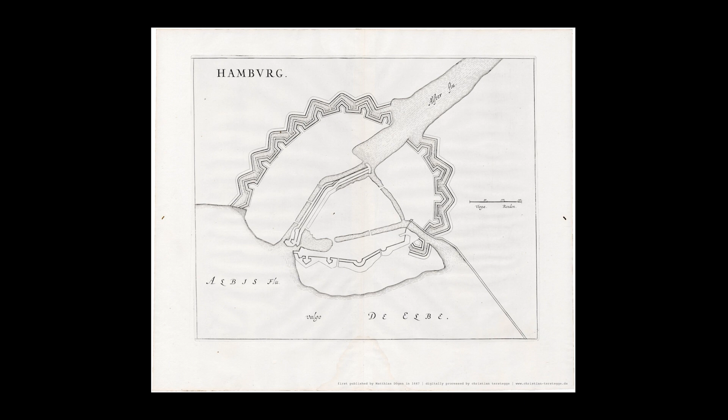This is not a very coherent or complete way of looking into the history, but this is a 17th century, 1650 map where we see the city was surrounded by this water and canal system. It was also connected by these waterways, and the Nikolai Church is probably the very center, and then the canal is today called Nikolai Fleet.

And the bridge is already there in the 17th century or even before. This is the so-called Holzbrücke, because at some point it was a wooden timber construction, but this significant bridge over the canal changed its nature, its appearance, its construction over the course of time. When we started the project, we really tried to grasp the essence of such a place.

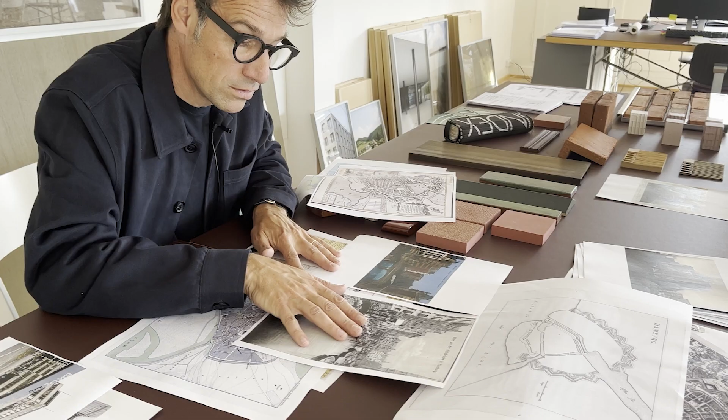That's Hamburg before the war. We see the canals, we see the presence of all these different boats and ships delivering goods. In that sense, as in many other places, I would even compare it not only to Amsterdam, but even maybe Venice. Of course, the facade to the river or to the water, to the canal, is a very important facade for a building.

And this is something that maybe comes back when we look at the design in a minute, because the way we understand urban architecture, we always try to relate and connect to these different layers of history and context. So it's not only history, it's culture at large, but we try to establish moments of dialogue or connections to what's there, or what is the history of the place.

How does a building, how does a house sit on a road that makes the crossing of the river? What is called in German the Brückenkopf, the bridge head, the building that forms the entry point to the passageway of the bridge. This is a very specific, and I would say an outstanding condition for an urban building, and this is what we're dealing with here.

Looking at Holzbrücke, having changed over time, we see the motif of this Brückenkopf. Looking also into different directions, Holzbrücke und Hopfenmarkt, you see here the Holzbrücke. In the back, we're looking at the market that at the time was also occupied by tent and market hall structures. And this here is our site.

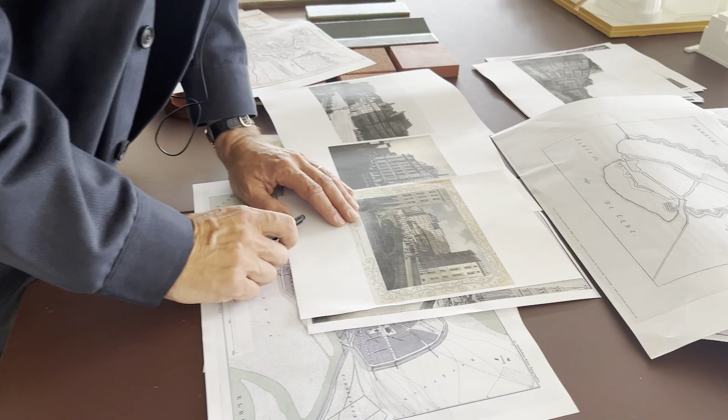This is Hopfenmarkt, and what we see dominating the square is the tower, the bell tower of Nikolai Kirche. The Nikolai Church was destroyed in the war. Only the tower got rebuilt, whereas the rest of the church, the nave and the whole space, continues to exist as a ruin. So it is a memorial, in that sense, a very meaningful and very prominent place in the city.

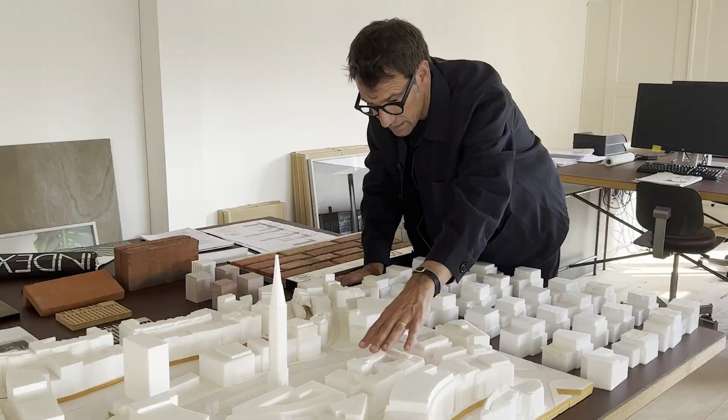So here on Hopfenmarkt, we see different types of buildings around it, and our project belongs to this row. What is particularly interesting is that this series, this row of buildings, forms a facade to the square, but at the same time, it also makes a facade to the Fleet. It's a sort of a canal that then joins the Hamburg harbor.

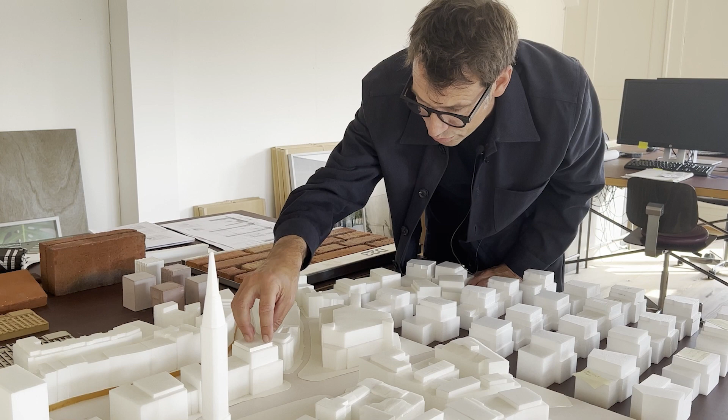Not only is our project part of that row of houses, it also forms a sort of a head. It is like the cornerstone within that system. So it is not only forming a corner on the square, but also it gives a face to the canal, and it is at the bridge.

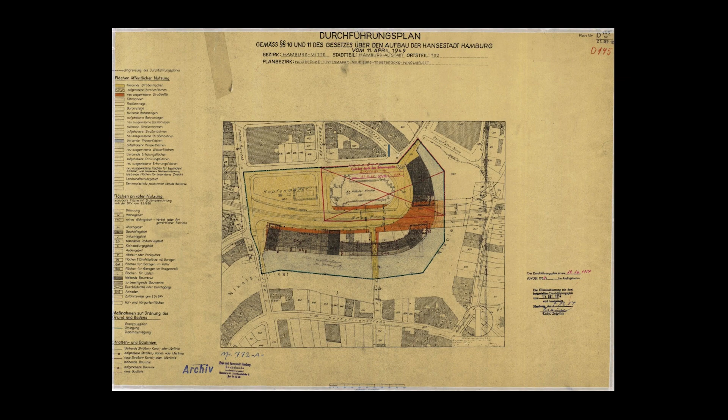To see what this actually really means if we go into depth in such a place like in the city center of Hamburg, what discontinuity, reinvention, rupture in a way, then also the attempts of trying to rebuild the pre-existing historic fabric, all these different and often contradictory attempts of building and rebuilding the city is an exemplary case here in front of us.

The further investigation was all about the proportion of these columns or pillars. It is not a classicist architecture. It is rather an attempt of giving almost an expressionist attitude or form to a modern building. So we see, basically, it is pillars and slabs.

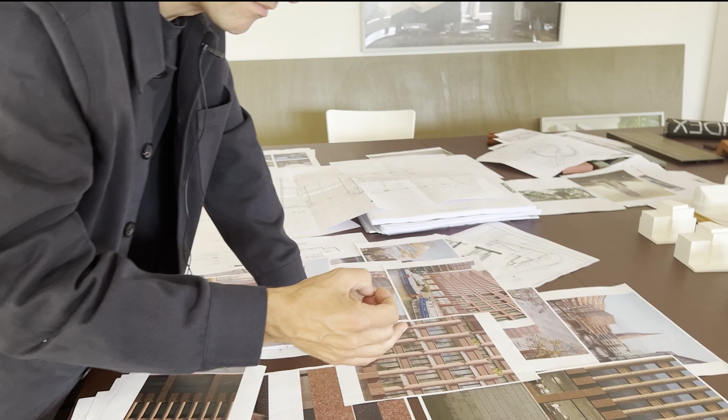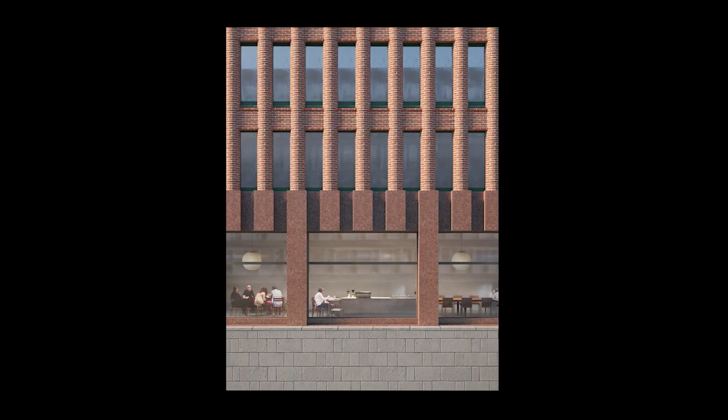So it's a very reduced concrete construction on the inside, reduced to a minimum. The facade is built out of brick, on a socle, on a base, which will be executed in concrete.

This is polished concrete, and then we see the bricks, and we see the rhythm of brick columns. They are rounded, so it gives even more of this plastic aspect to it. From then on, it's all about the proportions of the column, the vertical towards the horizontal, the width of the windows. In the case of the housing, there is a loggia, so the actual windows are set back from the pillars.

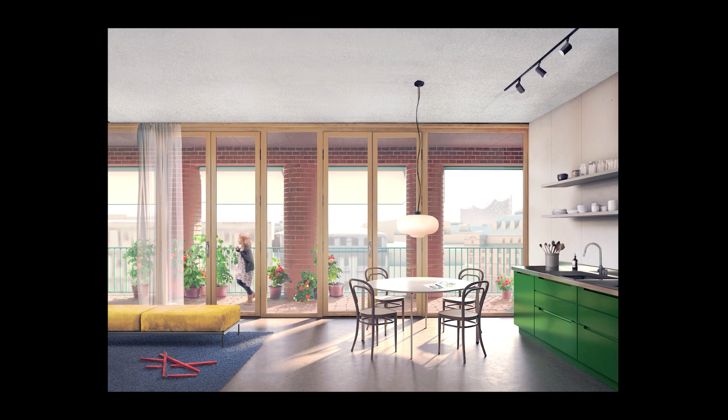Of course, this facade is also offering a specific quality from the inside, looking at it from the apartment. Here you see this is quite a simple space, the balcony loggia on the waterfront, the pillars that somehow set literally the frame to the architectural experience and the spatial condition.

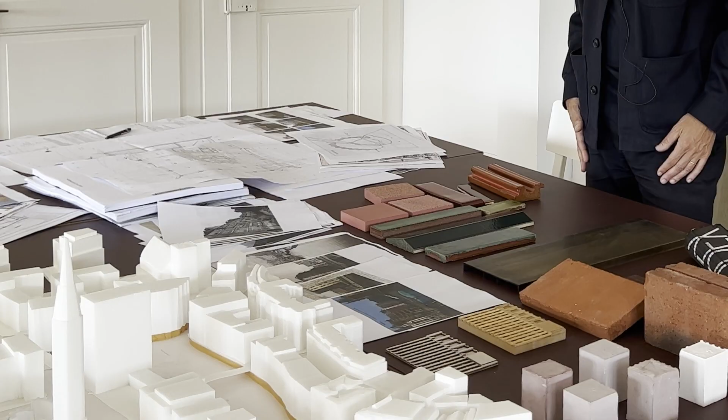We are conceiving a modern, contemporary building that is looking towards the future, but somehow it is rooted in all that. In that sense, we felt very tempted to use brick, which is not an original choice at all in general, and particularly not in Hamburg, in the context of Hamburg, which still has a very lively and, I think, also very productive brick culture.

So there is not only tradition, but it is also a very much contemporary reality. We were talking, and are still talking, to different brick manufacturers, and actually there is one not far from Hamburg. I think this is now one of the products that, together with the client and everybody involved, we are evaluating.

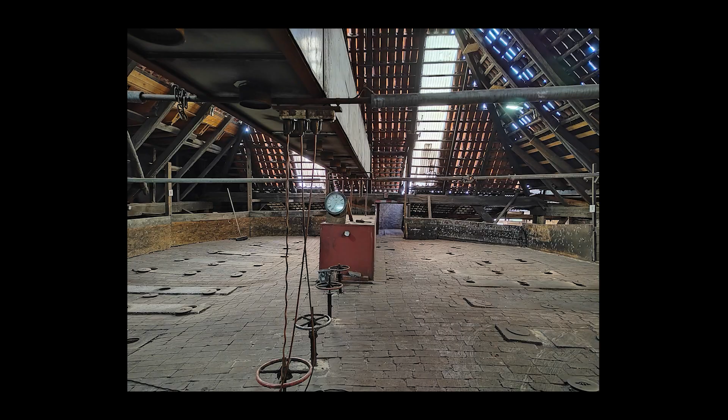It's a sort of ring oven, where the brick is not pushed or pulled on a conveyor belt to a conventional oven where the clay is burned and fired, but rather it is a circular building dating from the 19th century, where the fire is somehow migrating or wandering along the circle. By doing that, over 17 days, I believe, all the clay portions that are laid out are then burned.

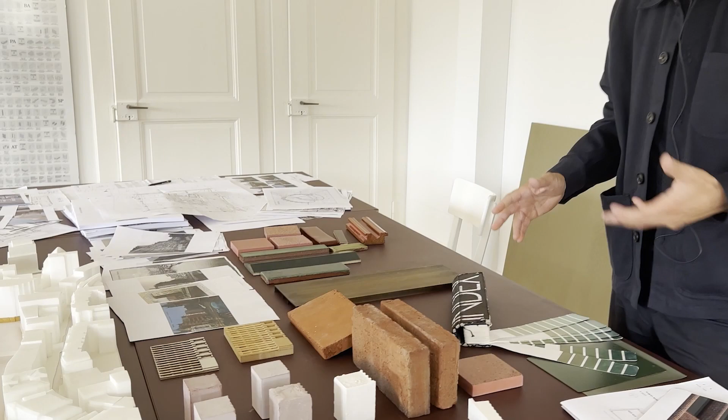So the idea is that our building is built of that local material that somehow belongs to the place. In that sense, this is quite a heavy and, I think, a beautiful decision. But then it is of course also to be contrasted with other materials.

The main windows will be timber frame windows, painted with a green paint, the green color. We are still testing different green tones. This is something that, as I guess most architects, we spend a lot of time finding the right tone, obviously, and then we do bigger samples.

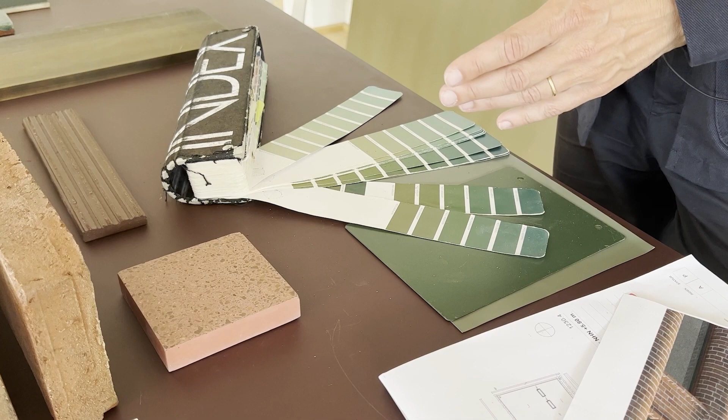We carry these samples with us in order to then build an even bigger mock-up, something that will follow. Parallel to that, we also use the computer and do these renderings, which try to give an almost naturalistic view of some details, how the window sits on the brickwork.

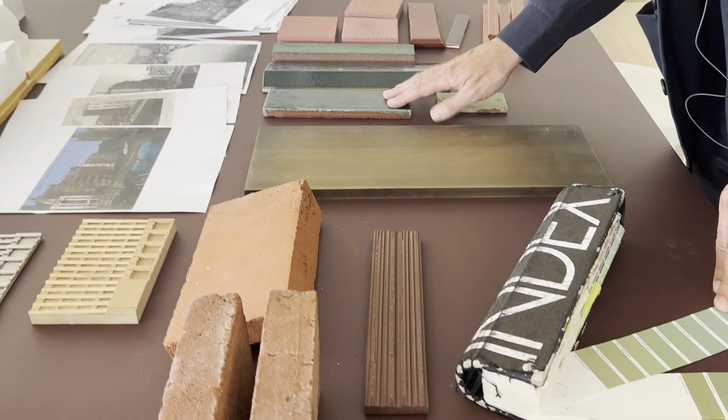What we are actually developing here is the green frame, which will then sit on a specially glazed green brick part that makes the transition. That's why here we still have some samples of different types of green glazing of the brick.

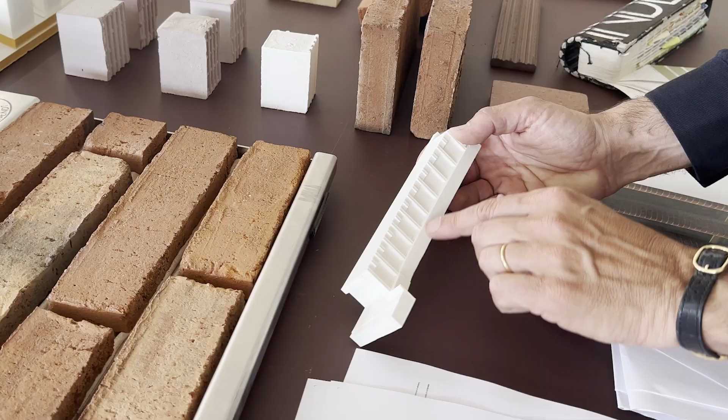I was trying to give you a bit of understanding of how complex it is to site this wall, the wall on the water, because in the end it's finding a very specific geometry that follows not only the legal line of the plot, but also the logic of the poles that go deep into the ground, because this building is in the water. So there is no linear wall, but a punctual system of founding the building, and the wall sits in front of it.

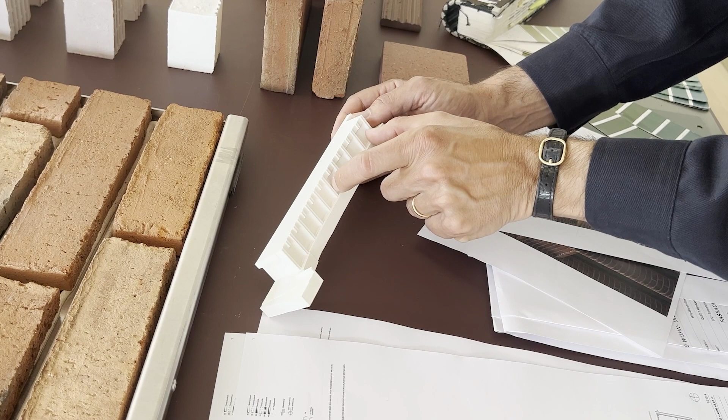How does this affect the curve and then also the rhythm of our main columns? You see the denser rhythm here is where the office building stands on top, and the wider rhythm is where the loggias of the residential are. And here is actually the bridge and the entrance.

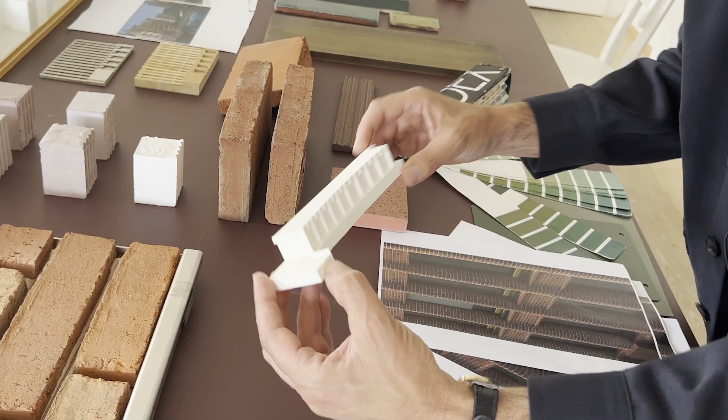It's just a detail, a fragment, like a bone, but I think it's important that we study these things carefully, as we do here with a series of plaster models, where it was more about the regular case of our building facade, the proportions of the pillars and the windows.

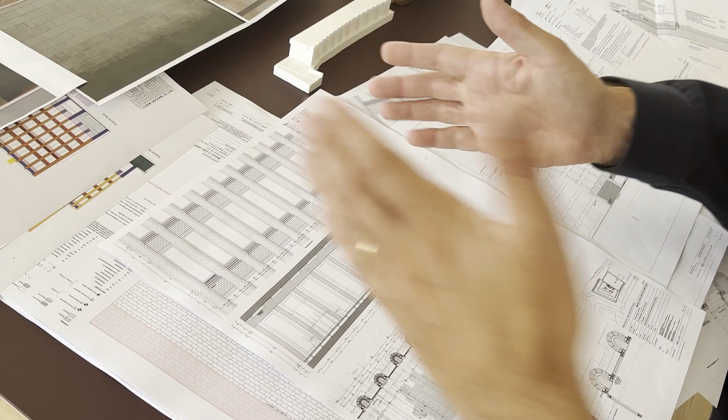In elevation, we can then measure precisely the proportions in the overall view from the Hopfenmarkt with the two entrances and the garage. And then here, a typical section and elevation from an office floor, where we see the rhythm of the brick, a self-standing, full-depth brick layer in front of these columns.

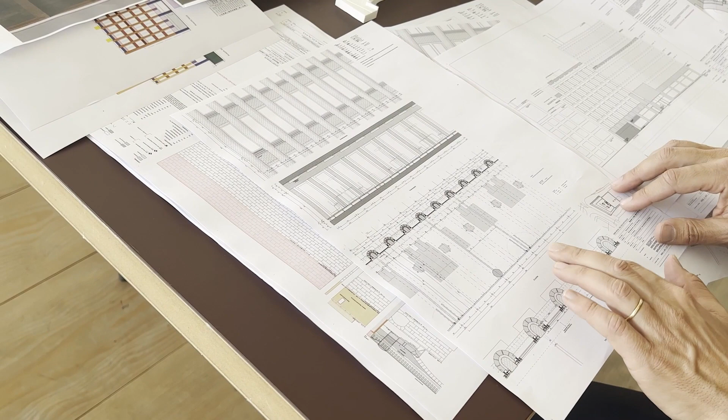We see that the brick actually needs to be formed in a rounded, special format, where we reach even more sophistication when it comes to expression and physical presence.

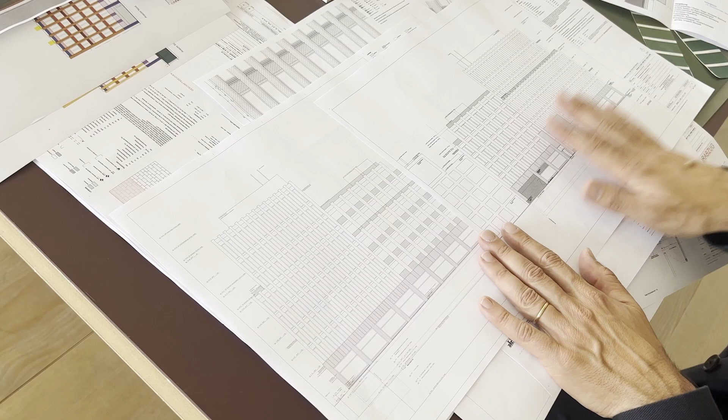And here we have the other facade from the river, and we see on both sides, canal and riverside, and on the Hopfenmarkt, the public square, that we have one figure consisting of two, subdivided into two.

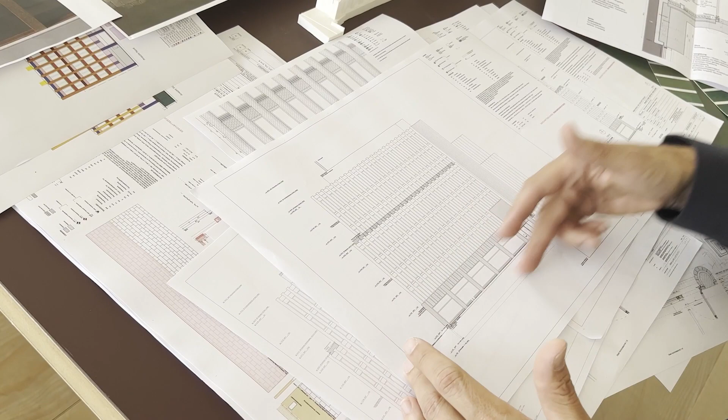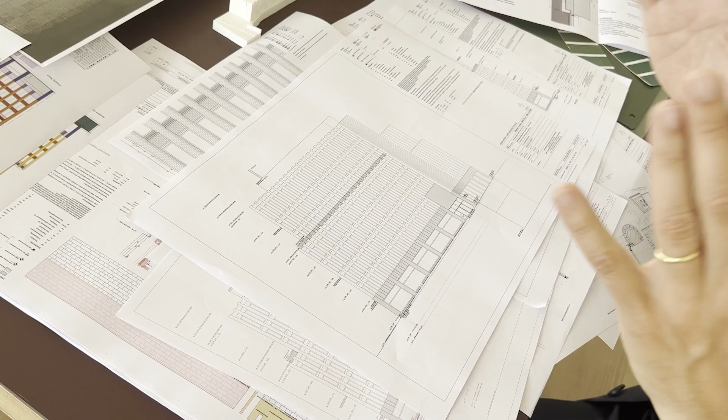Last but not least, that's somehow the front, and here we're cutting through to look at the front of that head, where we see how the setback works. On the canal, the facade continues straight up vertically, whereas to the square, it makes this setback. So there is, as we could see in the model, a differentiation in terms of volumetrics regarding the two different sides.

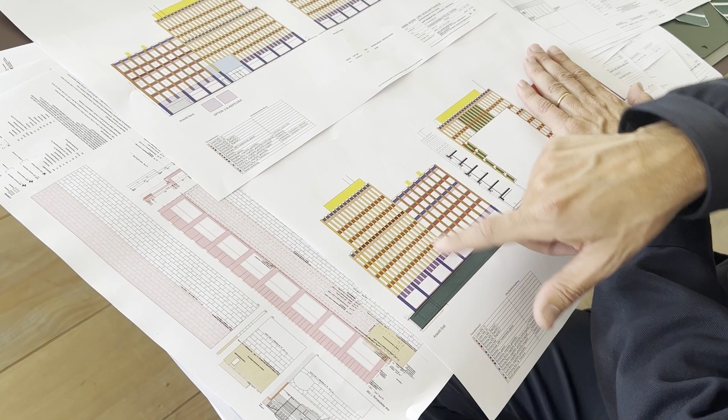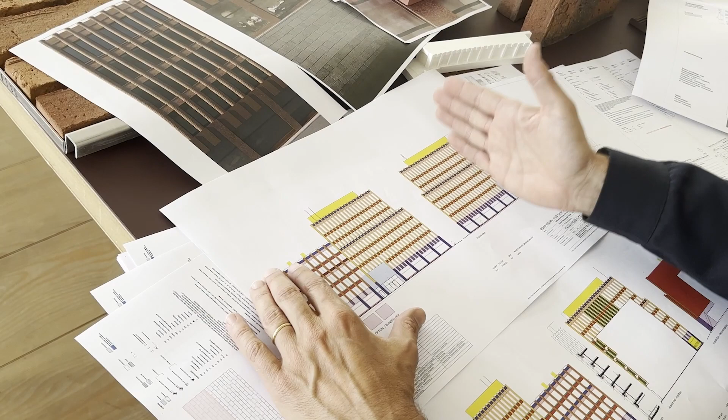And then I like this drawing very much, because here we see all four sides, plus this in-between layer to the neighbor, the party wall. We see the different facades with the color code, showing the different components, the different types of brickwork, and stone, or so-called artificial stone, Kunststein, the concrete cladding of the base. So within this very simple system of a grid with a vertical emphasis of the columns, it actually leads to a quite rich and complex system of different elements that create that one whole image.

So we spoke about the proportion, we spoke about the components. It is an on-site built brick construction, which I think is quite beautiful and maybe important. Here we have some more of these close-ups, giving us a precise understanding of how we try to relate the base in polished concrete to the brick.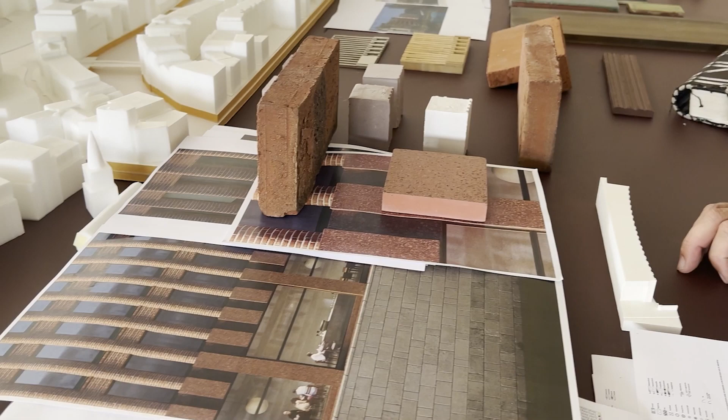It's a red pigmented concrete that we see here. Maybe this is coming quite close. Of course, it is also about the joint, and we like that there is a strong reading of the joint. The precise color of the joint, the mortar, is still to be defined. Of course, as everybody understands, it makes a huge difference whether this is closer to the brick and creates a homogeneous continuity, or whether we want the contrast, as we are showing it very clearly on this visual.

We've done another building for Lindt and Sprüngli in Switzerland, in Zurich, outside of Zurich. It's basically a red brick box, where the mortar, the joints between the bricks, are in exactly the same breadth as the brick, and it makes a totally different effect than what we are looking for here.

So I like these subtle differences, and I believe building in a context like the city center of Hamburg, these things particularly matter, because there we can maybe also bring back dignity to a place that lost its dignity, that got destroyed, that has been trying to regain its urban personality, maybe also through the means of architecture. And that was a very unstable, very fragile, and difficult project, I would say, from the 1940s up to nowadays.

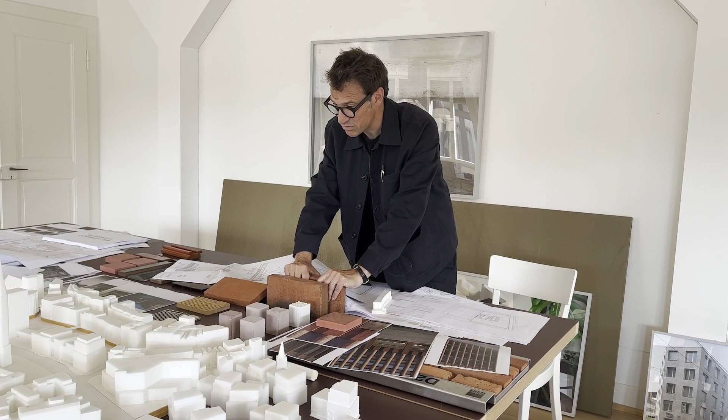And that's what I think architecture can do—be part of a bigger development, which is the European city, as it is the case in Hamburg. That's what we've done in our office in many projects, trying to make that contribution in a quite rich urban context. We believe and hope that our designs are physically lasting to a certain extent. We want them to be well built. I still believe it's a bit old-fashioned, but I believe this matters—how a building materializes, but also its character, its expression, its physical appearance should be stable and long-lasting. And there I see a very important part of what we call sustainable or durable nowadays.